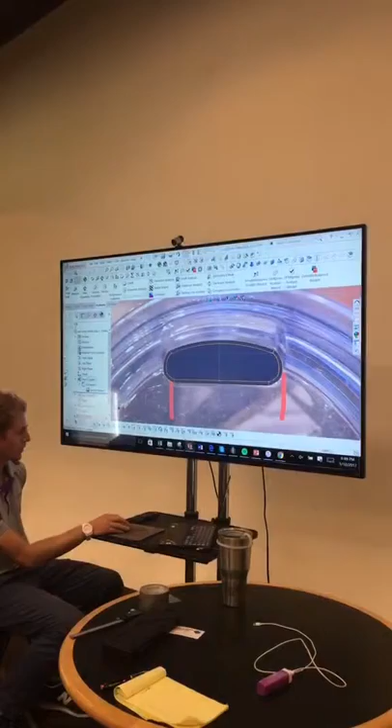It's already built, but what I'll do is I'll just go back. So this is the feature tree, like the steps I used to make it. So I'll just roll back and kind of go through it, just to show you how I did it. There's a little bit of a lag. So I was talking about the picture. And so the very first thing was, let's see if I can show you here. Yeah, thanks. So that's the picture, and I measured it out.

And so I started creating, I may have written it down there because I didn't want to forget what it was. And I started creating just kind of the bottom of it. Now what I did was I tapered it, and I have one of the prints over here, but I knew that it had to kind of fit in there and jam at some point. So I put some taper on it, and I kind of used that there. So that's the end result.

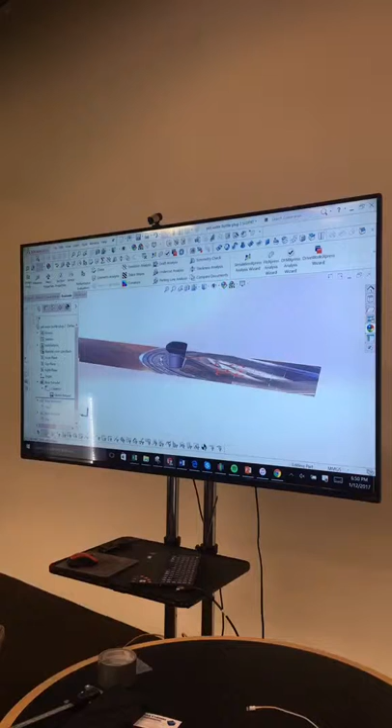But the first step was I kind of just started creating that taper, and then made it longer. So imagine that's kind of sticking through into the cup now. So I know it's gonna fit at some point along that.

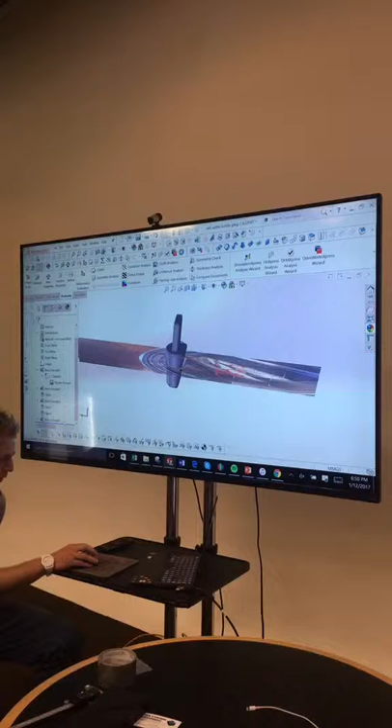And this is a really simple model, but it does solve a problem. And then I just put a little handle on it, and then that's it. So okay, that's the 3D file, right? So I can see it. You know, I can measure stuff in here.

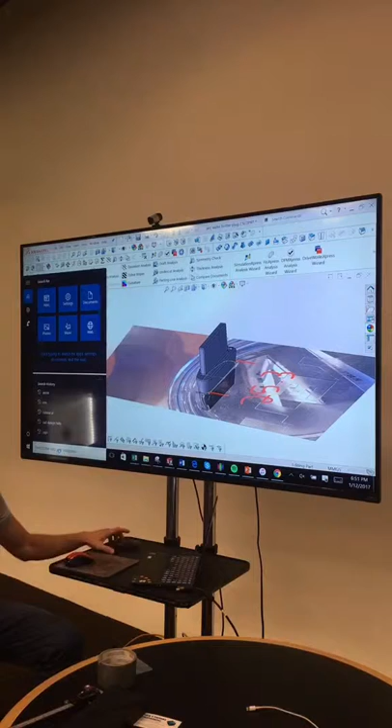Like if I want to know how wide this is. And just the experience of doing this kind of gives me like, okay, I thought this is going to work, but I don't know if it's going to work. It's just in theory. So I'm at that phase, and the next thing that I do is I actually have to export this file out as what's called an STL. That's what you need for 3D printing. So I hit Save As, and then I hit STL over here. But I've already done all this, so I'm just going to skip that.

Now I'm going to show you how I 3D print it, and I'll actually turn on the machine and do that. So I have a program here. This is called a slicer. If anybody's ever 3D printed, the STL file basically is like a bunch of triangles. It's just breaking the CAD file into that. When you load it in here, this program will generate what's called G-code. That actually is the path that tells the printer, move here, put down plastic here, and all these things.

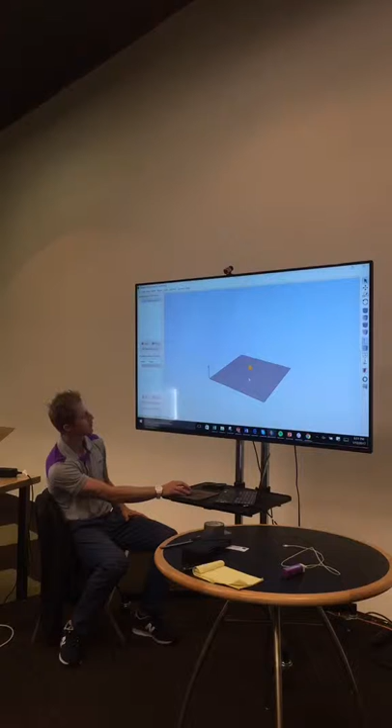And so in this program, here's the part, like I just showed you earlier. And I think this is probably on my Fusion. I have 2 more printers, or 3 more, and so this is a lot bigger. This represents the space inside of here that it can actually print in. So you can see, even on this machine, that little thing will easily fit.

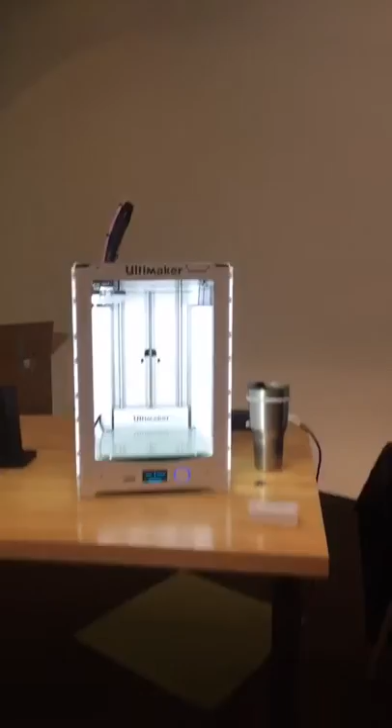And what I did was I'm selling these online, and I used to make one at a time, and then I realized, oh, this is really dumb. I'm gonna print 100. So I printed 100, and now I've got a big stockpile available. I'll have to set it up and run it one at a time. But okay, so I've got it on there.

It's amazing how many settings you can do in 3D printing. I'm still learning every day all these different things, but you kind of get it set up to where you want. I'm not going to go into all this right now. The main thing is you get it set up the way you want, and then you can hit prepare to print, and now it generates the G-code. Like I said, you got to hit this save toolpath thing here, but that gives you your file. So I take that file and put it on this little SD card here, stick it in the printer, and now I'm ready to print.

Now when you're in that program, you've got to have it set up for the material, which is what I have in here. There's different types. There's PLA, which is what I made this out of, but there's a bunch of other things, depending on what materials you want to use. I knew PLA would work fine for this. So once you get it in the printer, just hit the print button, scroll down here, and I call this the Yeti plug. So that's the file I have up.

You gotta have glue, that's important. The plastic won't stick otherwise. So you put the glue down. I don't need a ton, because it's just a small piece in the middle. All right, so I got the glue on there. Maybe a little bit more. All right, good enough.

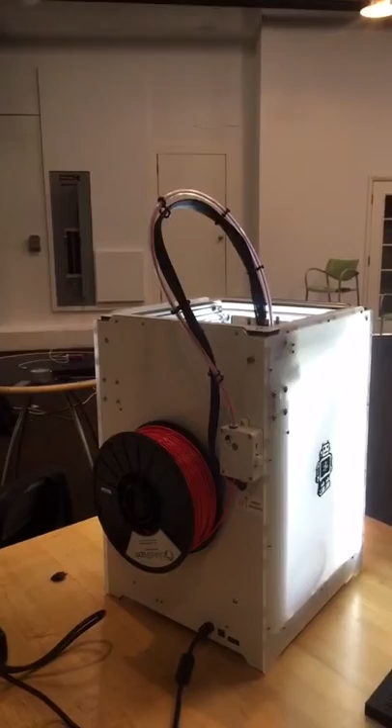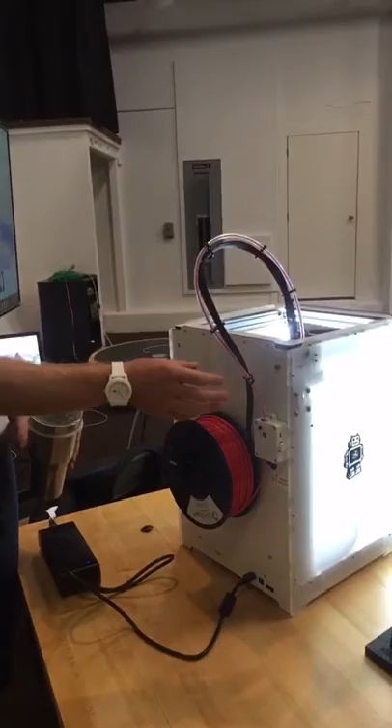So FDM stands for Fused Deposition Modeling. So what this is doing is it's going to pull this through here, through this tube. This is called a Bowden tube. Most FDM printers work this way, but some of them will actually not use this tube and they'll pull the material here. But this is the extruder. There's like a gear in there. It's gonna push this up through the tube into this nozzle. This nozzle's hot, it melts it down.

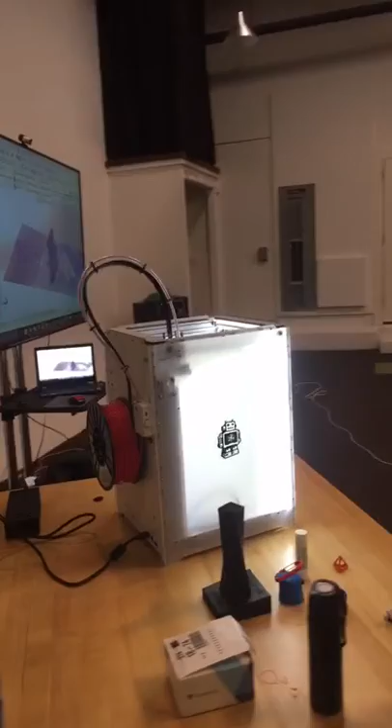And then what's gonna happen is it's gonna build it layer by layer. So if we look at some parts here that I've already made, you can see, and I'll pass this around, there's little lines. Well, each of those lines is a layer. So imagine if this model here, at the very first layer, it's just this square, and then the next one's up just that one, and so on. And then over time, it builds the model in 3D. So that's pretty much how it works.

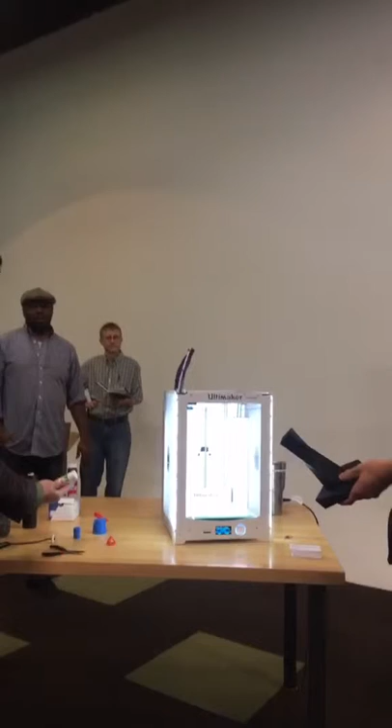Any questions on this part of it? This is going to start eventually. It's at 48C right now. Is that two pieces or one piece? This is one solid part here. It ran out of material. That's why it ends like this. Okay. It was in the middle of the night, and I thought I had calculated I had enough, but I miscalculated. So let's see. We're at 51.

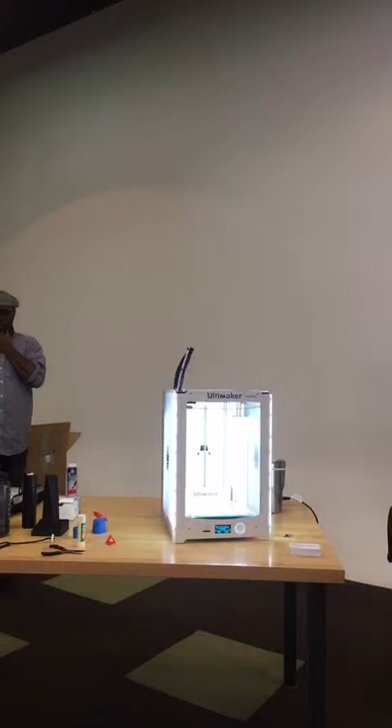And if you guys want to see some of these other things here, go ahead and pick them up and look at them. This is just a regular paper glue stick. Yeah, exactly. Just like school glue. Have you found that any work better than others? Because we struggle with the warp. Well, do you have a heated bed? We do have a heated bed. You do? Okay. You have to make sure you have the right temperatures for each material. That's important.

Okay, well, we're not trying to. Which machine do you have? The U printer. Okay. It also helps. I haven't ran ABS on this machine, but one of my other machines is a Fusion3 F400. It's enclosed, so it captures the heat better. While this is doing that, I can bring up their website and show you what it looks like in Fusion.

Okay, yeah, so this is my machine here. So this thing's really big. I can't even get it in my car, so I couldn't bring it if I wanted to. I'd have to run a van. I didn't want to go through all that. But it can make really, really big parts. That's why I got it, because there's been plenty of projects I've worked on where the only way I could do it before I got that machine was I had to split it into parts and glue it together, and it's just suboptimal. You know.

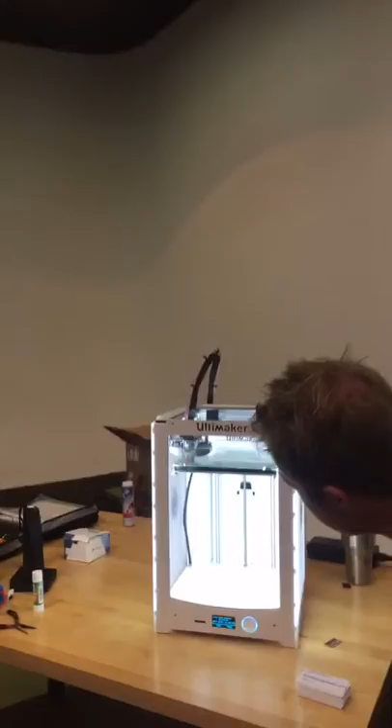And here it goes. All right, so that's the very first layer. Well, that's actually the perimeter layer. So this just kind of puts down an outline. So now it's doing it. So imagine if you had this plug, and the very first section of it is just that thin little thing, and then it'll fill that in, and it'll keep going up. So that's what it's doing right now. It's filling in the bottom layer. In this file, it says time left 20 minutes. So you know, this little small part doesn't take too long.

Have you sold any of those plugs yet? Oh, hundreds of them. Really? Yeah. Like I'm saying, solve a problem. If you solve your own problem, you're likely to solve other people's problems. The number one complaint with this cup is that it has the hole in it. Like I did a Google search for Yeti cup reviews, and everyone says, "Oh, it's a great cup," but "I hate that freaking hole." I'm like, "Well, plug the hole." So, you know.

I'm getting into that. That will be the next part of the presentation. Yeah, and that's also what I want to get across about invention and design, is that it's a process. You'll come up with the first one, and then you'll find, oh, I can improve this, or I can improve that, and it goes from there.

Have you made any case with Yeti at all? I did try to license it to them, and they did not want to take my phone calls. But I'm in talks with getting it in Dick's right now. I've showed it to them, so we'll see how that goes. Hopefully I'll get it in there.

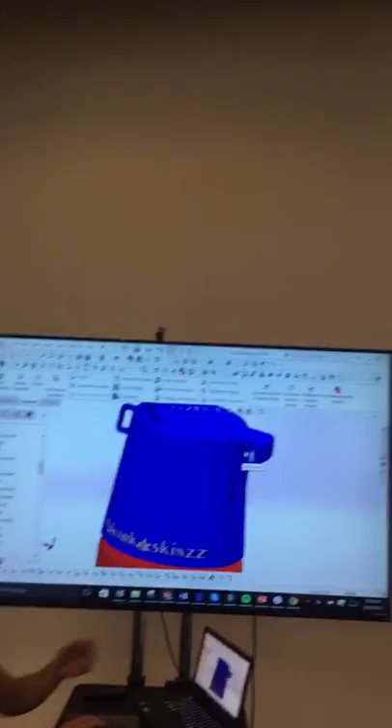You can see his company's Sharkskinzz brand. So I put that in. You got a little shark guy there. I didn't put in the model of the actual hinge thing. It really wasn't needed. I just needed to have this in there. Let's see. What's cool with 3D printing too is you can 3D print functional parts like these threads here that I made.

Actually, who has the part? I didn't print the whole bottle. He just wanted me to print and make sure that it worked, he wanted to see this part and make sure that worked. So I just cut the model here like that, got rid of the rest, saved the new file obviously, and then I made that to make sure that it fit. So you can play with that, and you can see that it screws in. So that's pretty much that project.

Once I had done the printing, he didn't want to make full-scale parts with that. He already had planned to go to injection molding, and since he's done so many products, he has a factory in China that already does it. So with the 3D CAD file, the company in China can take this and mass-produce it. But the important thing here is that the 3D printing proved out that everything works, and then you go to mass production.

So, any questions on this example? I got one more. I might get through this quicker than I anticipated, but I'm sure people have questions at the end.

I have so many things I've done, but I can only talk about stuff that I didn't sign NDAs on, or the people that didn't mind sharing. Okay, so I did that. This last one here, it was more of like an art project, but it's still something, you know, so it still has to do with product design and invention.

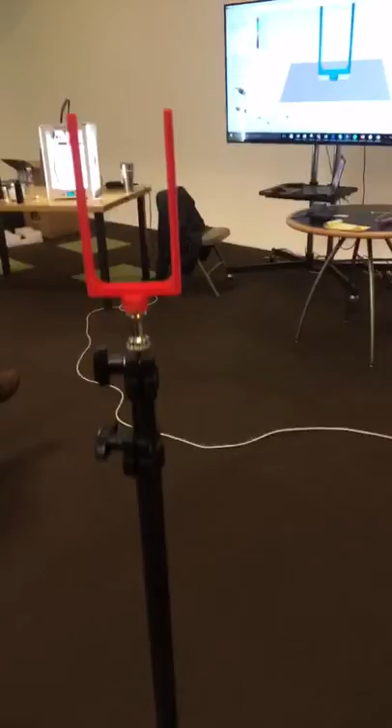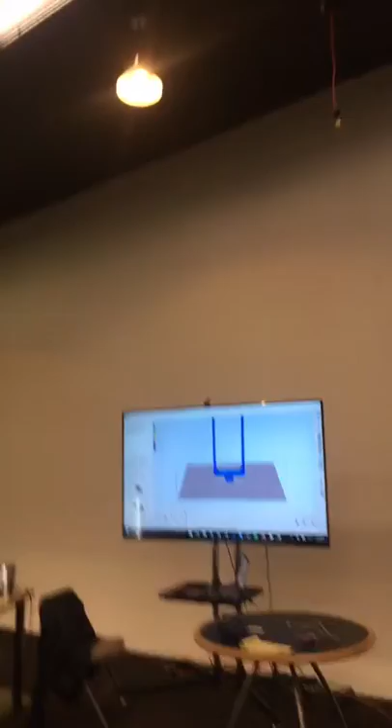I actually 3D printed this yesterday before this presentation because I knew I wanted to record it. So that's what's on the screen. So what I'm gonna do is put this back in this holder. Okay. And so what's going on here? With 3D printing, I was going over how it has the lines, how it puts layers down. Imagine a shape like this, like a bridge. Like a table even, imagine a table.

Like imagine I'm printing this table. This is fine here. It's gonna print this, it's gonna come up, it's gonna come up. But all this overhang, even this area over here, there's nothing. So once it gets to this layer, if there's nothing below it, it's just gonna fall down. It's just gonna sag. Because this plastic, it's a thermoplastic. So once it comes out of the nozzle, it starts to cool immediately, but it's not instantaneous. So it's like a noodle, but it's hardening over time.

So it can go a really short range. Like it can go like that far, but then it starts to sag. So you have to have what's called support material. So if I printed this table, I'd have to have bridges coming up every millimeter, or probably less than that. That's a ton of waste. All the support material is waste. It doesn't do any good. It's just there to hold it up.

So the best way to print this table would be to flip it all the way upside down, 100%, because then it prints. You wouldn't have to have any support material if I printed this table upside down, because this whole thing, all of this, would be just nothing. It wouldn't need any support, and then these could just print all the way up.

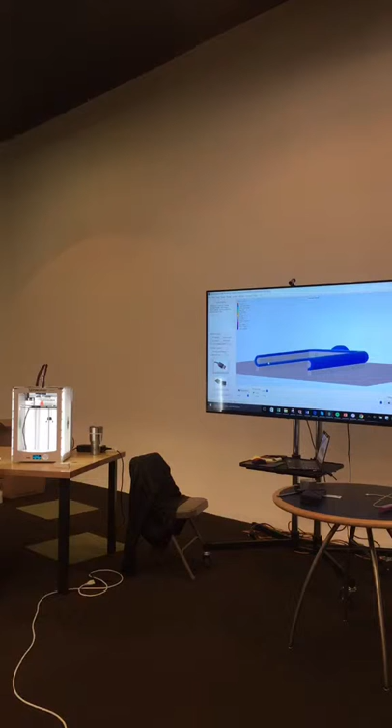Now this comes back to resolution in the layer lines. There's a couple of factors here. So one is the nozzle itself. How can I explain this? Maybe I can draw, or actually what I'll do is I'll go to one of my blog posts. That would be a good idea. On my website there's a ton of information too, if you ever want to read them over. I've written about 50 blog posts.

Can you print color too? Color? Yeah, different color. Yeah, absolutely. I've got 20 different colors. I just have red loaded in here, but normally white and black is what most people want. So you use 2 different extruders, or you use ink? No, I'll just change the material.

Now, yes, I was at CES last week. It's a huge consumer trade show in Vegas, and there were plenty of machines there that have 2, and maybe I'll get one. Like I said, I have that old machine that has 2 extruders, so I could do 2 colors simultaneously. And you could literally change each layer. You could do one layer green, blue, or whatever. You can only do those 2 colors, but you could do that. I haven't seen too many requests for crazy stuff like this, but it can be done.

You can also paint it. This stuff is no problem painting. You can spray paint. You can actually make these parts look really, really good. If you put some time in, you can sand it and make it really smooth and then paint it.

Have you ever seen one of those paper sculptures where the guy has some glue and he glues on each sheet and he carves the paper? I have not, but that's pretty much like 3D printing by hand. That's literally 3D printing by hand. Yeah. You could also call it layer by layer manufacturing. I don't personally want to invest that kind of time in gluing paper and cutting it, but that's kind of a cool thing.

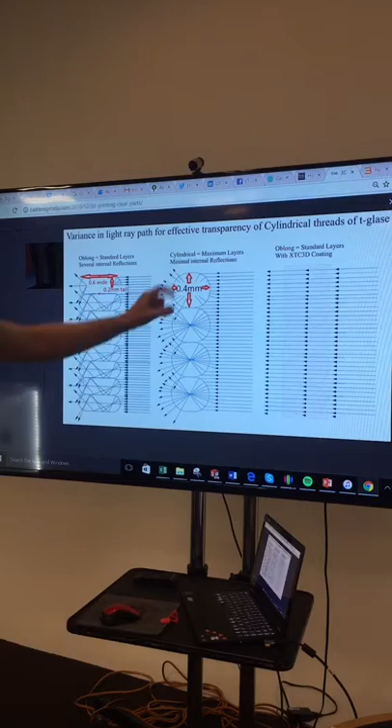So you can see the light's really scattering through. If you make these, see, several internal reflections. Here, there's less. So first of all I would set it up that way. And there's actually this coating. I've used this on other parts for different reasons, but this coating kind of fills in the gaps and lets the light go straight through it. There's actually a picture somewhere where I borrowed this from that shows that part being perfectly clear.

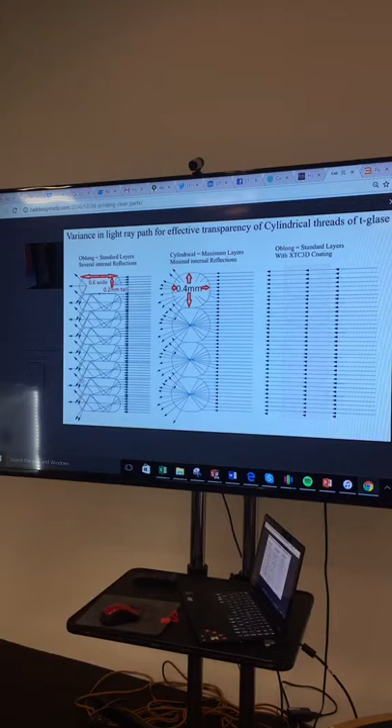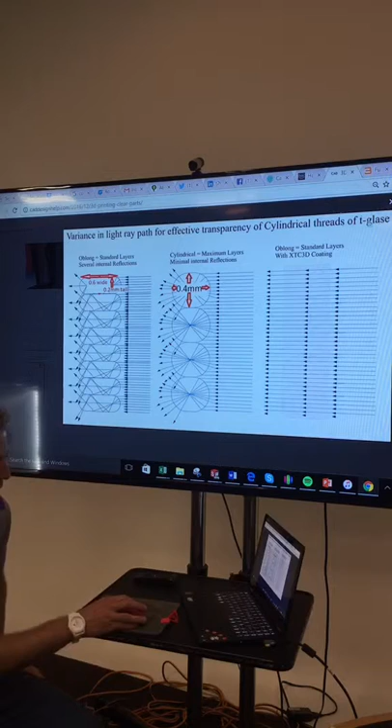But here's the trick to this: this only works if you have a single layer perimeter, which is very thin. And the function of the part that I had, being this window of this container, that was a design constraint. I couldn't make this part that thin because if I did, it would just break. So that idea of using that coating wouldn't have actually probably worked here, but it's kind of a cool thing to see. So.

If there's more questions... but if not, then I guess that'll wrap it up for the January presentation. What if you were to take a heat gun and try to melt it a little bit, can you smooth it out? No. You'll just get a big mess. It'll smear and stuff.

Now, there's a cool trick, and I haven't done it personally, but with ABS. This material here was PLA, but with ABS, you can actually put it in acetone. I've watched some YouTube videos of people doing it, and it will actually melt the outer edges. It must be a chemical reaction, but it'll melt the lines together. There's plenty of people that have done it.

Are they dipping or spraying? There's a couple ways. If you put it directly in, it might overdo it and wear it away too much. The one guy I saw that did it used a vapor bath. He used just a couple of drops in a jar, closed it off, and then heated it up. The heat filled the whole thing with this acetone fog, and that worked really well on it.

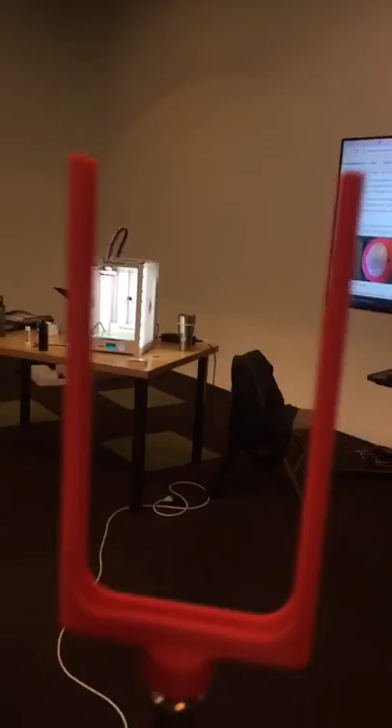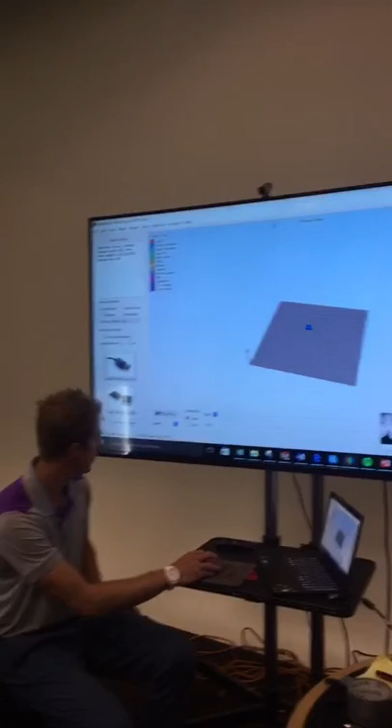So can you program that to just continuously make another one after one was done? Actually, when you set it up, I could do more than one. It's really easy. I just go back in here, and if I've got the model here, it's already highlighted, so I can just duplicate it. This is what I did, because when I'd sell one, I'd be like, now I've got to print another one. Why don't I just print 100?

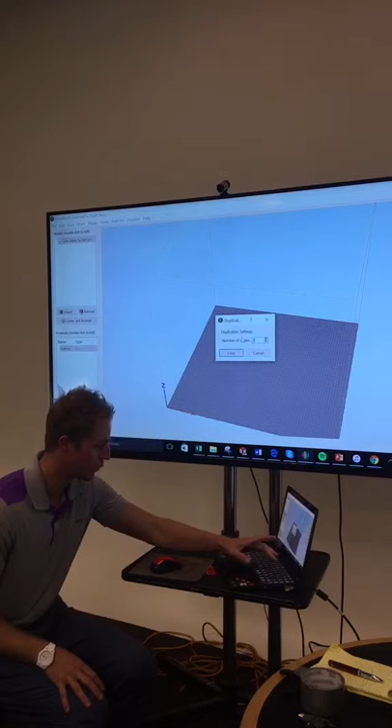Let's just say I do 20 at a time. Boom, 20. It's sticking off, but the program has this nice button, center and arrange. I've got 20, well, 19 for some reason. And it won't print one at a time, it'll print each layer at a time, because you don't want it going up and down and running into it. If it prints the first layer of all 20, it can't run into it. As long as it fits inside the cube, because you don't want to go too tall, you're good to go.

How did you get this piece to mold to this piece? So I know a guy that works here, and I texted him yesterday, and I said, you guys got a tripod mount? Because I didn't have one for my phone. And he said, yeah. I didn't think he would know, but I said, do you know what screw size it is at the bottom? He said 1/4-20. So I just went on Google. I looked up the specs of a 1/4-20 thread.

And what's cool is that the 3D printer can print functional threads too. So let me find that file. What was it underneath? I can show you. It puts the threads right in there, and then it's screwed right on. Let's see here. Here we go. So here's that 3D file of that thing. And then if I zoom in here, you can see there's threads in there. Yeah, and so it screws right on.

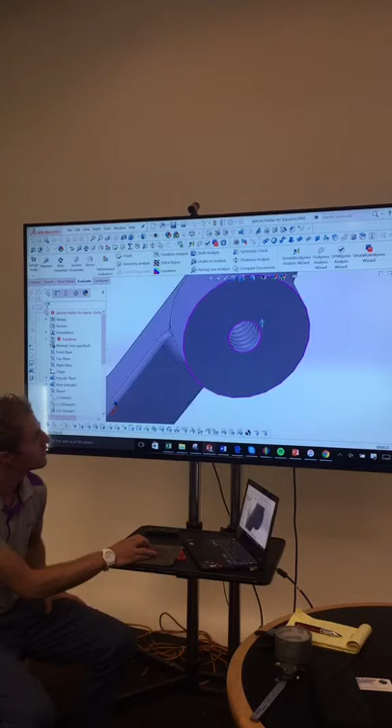Interesting thing about this is that, talking about support material, I made sure that I only put just a little bit in here, because if it overfills this, good luck getting it out. It's one of those lessons learned I did at the beginning. I printed something and it was impossible to get out of this little hole.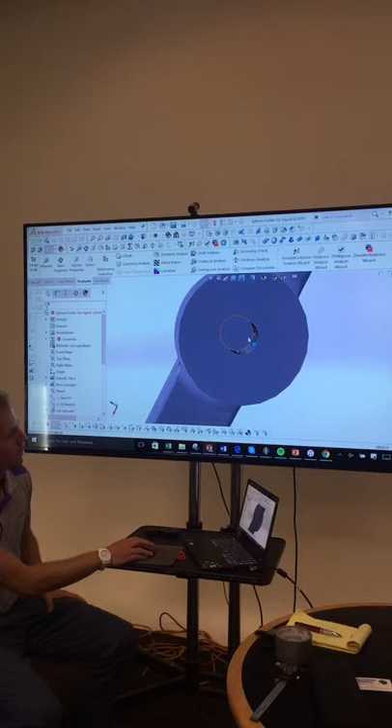But see, this area here may even come out without any support, because we're talking about the bridge again, about how much overhang. This is really small, so it might have been fine even without it, but I put a couple really, really small ones in there. You can actually pick what size the supports are.

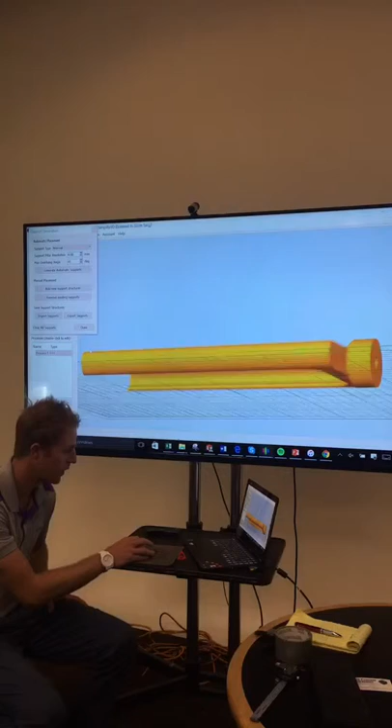So if I go into here, this is the manual supports. This is kind of like if you're getting more advanced. That's what this support resolution is. I had to pick 1 millimeter, because this is a pretty small hole. So it's just putting a 1 millimeter post, essentially. If I pick 2, it'd be a 2 millimeter post going up, and so on.

Do you use the same software for all your 3D printers? Yeah. So this was the first one that I had that came with the Fusion, and when I got the Ultimaker, almost everybody uses a program called Cura. This one's actually a paid one, but I got the license included with my printer. But I already learned how this one works. They all kind of work the same, but the buttons are in different spots, so it'd be easier for me to use one. So luckily with this, I can.

It's called the slicer. The program that sets up the file for the printer is called the slicer. Luckily, this will work on the Ultimaker as well. So all I've got to do is go up here and change the version. I can even show it to you. Right now, see, this is the smaller print bed. If I switch up here, here is configuration. If I want to make this on my Fusion, I just hit that and then I pick it.

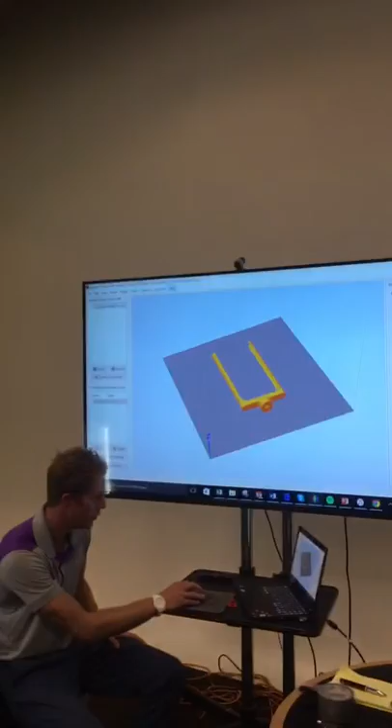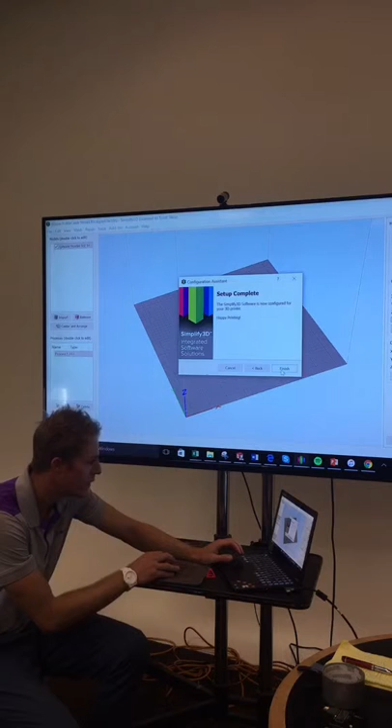They've got lots supported. Look at all the printers on here. There's hundreds of them. But mine, where's that? Fusion 3, F400. There we go. Boom. That's pretty cool. It just grows because that's how much bigger it is. Yeah, this thing's massive. I've never printed anything that took up the whole height, but the mask was only like a half moon shape in the center, only like that wide.

On their website, I think I showed you guys earlier, they printed that entire box, which is just mind-boggling. That's just crazy to me. I think they just did it to show, hey, it can be done. Normally you buy these rolls. This roll back here is 1 kilogram. I think they probably had to have a 5. The biggest that will fit on there is a 5, I think.

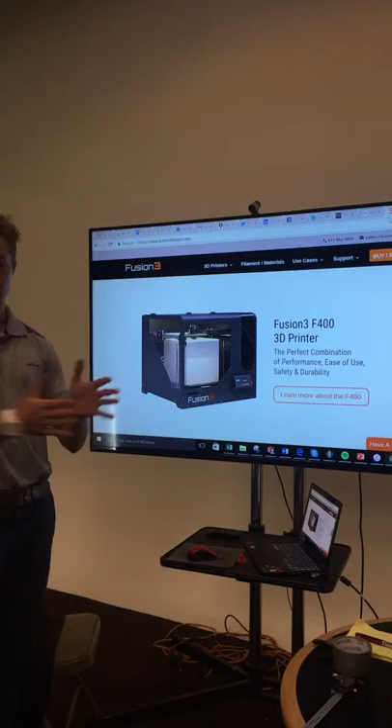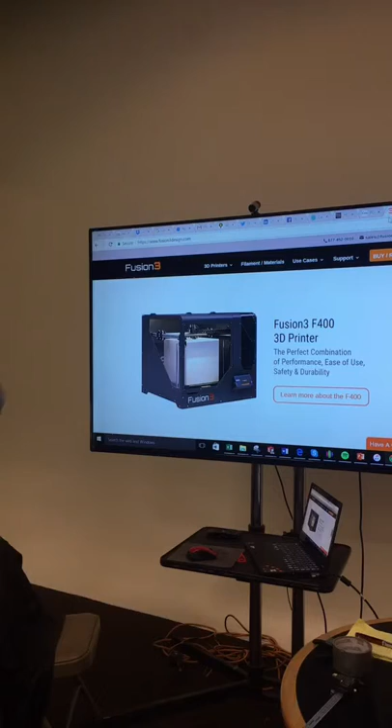It's possible that even the 5 wouldn't fill that up if you made it 100% dense, if you just wanted this massive solid block of plastic, so you'd actually have to change it in the middle of it. You can do that on your last bit, but you've got to be there. You can't walk away. Normally these machines run themselves, so you could just turn it on, and when it's done, it's just there, right? So I don't have to sit there and watch it.

But if you ran out, you'd have to be there ready to load the next one right behind it, because I think whoever figures it out is going to be a millionaire. If you can figure out a way for the machine to know when it runs out or if something goes wrong, it'd be awesome. Because I had so many prints where something happens and it gets stuck in here. This doesn't know. The program just keeps having the head move around, but the material's not even coming out, so it's just moving around in air.

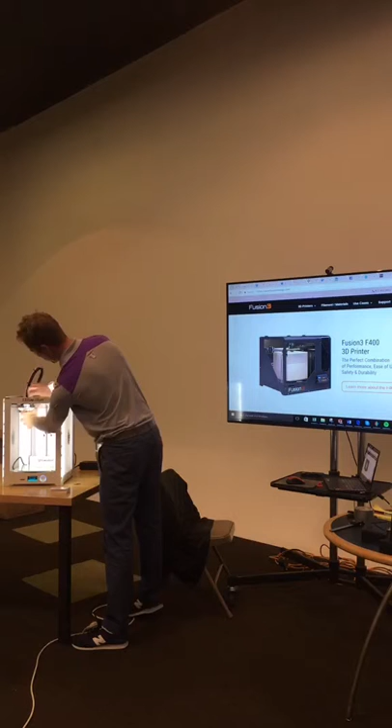I've had so many things go wrong, I can't even tell you. I've had something jam up and then the plastic wraps around this entire hot end, and this is just destroyed. You have to throw it away and get a new one. If you're under warranty, it's not so bad, but if you're not, then it's like $100 or more to buy that. So if somebody could figure out a way that the machine would know it's out of plastic, something's not right, it's jammed, and it would just shut off, that would be really nice.

Maybe that's your next project. I'm not in the business of making 3D printers. There's so many people out there, and that's not really what I want to do. I'll let those guys handle that issue, but that's the thing. If somebody can figure that out, I'm going to buy that machine. And I could probably figure out doing a webcam. I think that's what I want, just to at least keep an eye on it when I'm not there.

But imagine something is wrong and you're 30 minutes away. You'd have to leave whatever you're doing and drive back, and you're still going to lose 30 minutes of material. A remote stop would be good. I think people are working on that.

Well, going back to those threads, couldn't you just use a tap? Oh yeah, absolutely. But why would I do that when I can just put it in the model and not do any extra work? But yeah, it's not hard to machine this plastic. It's just like injection molded parts. These aren't quite as strong as injection molded parts, though.

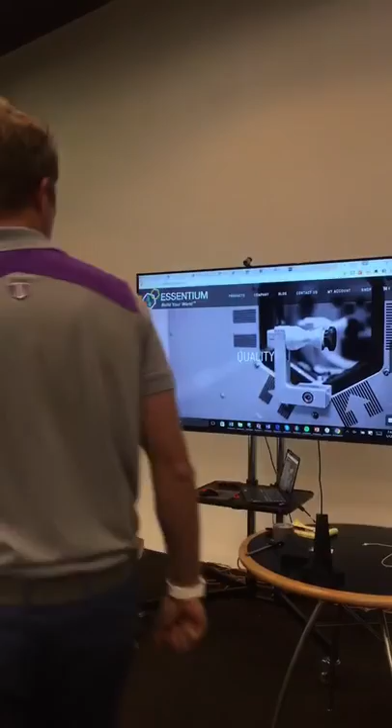So they've claimed to figure out a way to have these layers bond stronger together using, I think, some kind of fiber or something. Let's see if I can find it. I'm gonna try that out and we'll see. That's the real weakness in 3D printing. I think this is called the fuse filament. So see what they talk about here: through our novel plastic welding process, you can join all adjacent filament traces together, virtually eliminating the Z-strength penalties. So the Z-strength going that way is the way that the part would fail, most likely.